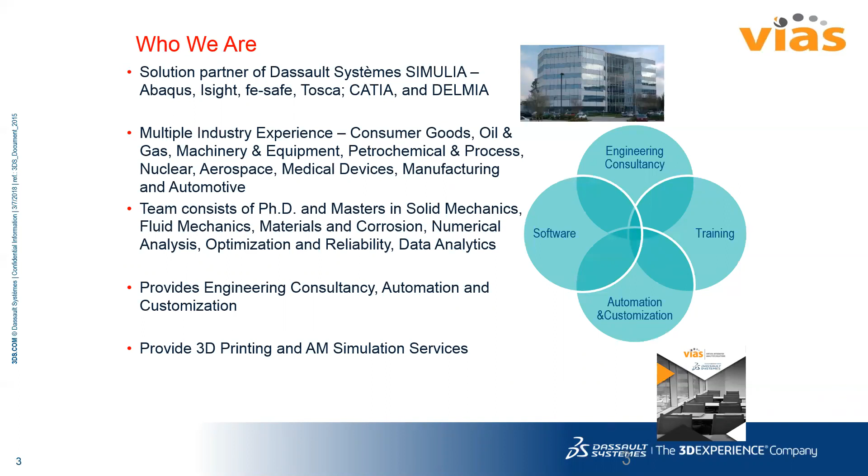So with this, I will hand it over to Jose for the first part of the simulation on the model preparation, and I'll take up on the simulation part later. Jose, can you take on the model preparation part? Yes, of course. Can you hear me? Yes, we can hear you. Yeah, so I'll let you drive.

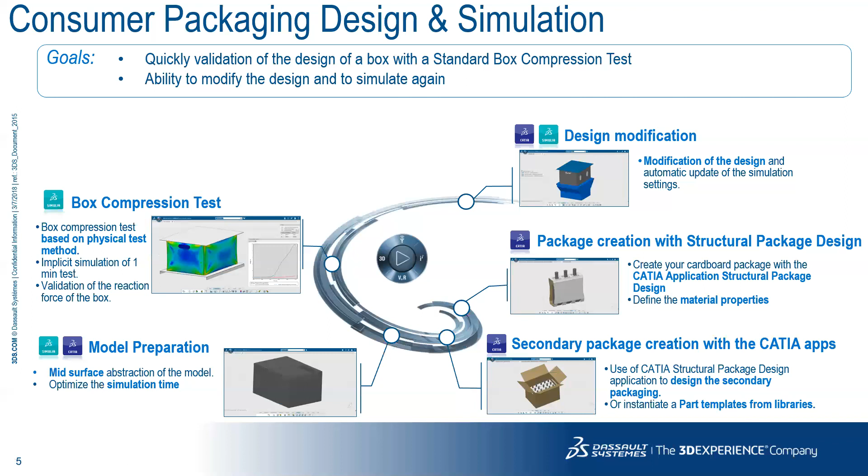And I am going to start with the creation of the package using a dedicated application of CATIA, which is called CATIA Structural Package Design. In a few words, the advantage of this design application is first of all to be a 3D native application. So it means that you are going to be able to design here, for instance, the secondary packaging around the bottle, around the primary packaging.

So what it brings, in fact, it helps to enhance the collaboration between the different stakeholders of the project. For instance, here, a brand manufacturer with the packaging supplier dedicated to carton packaging. So it enhances the collaboration and it guarantees a strong brand image all along the design of the different components of the packaging system.

From here, you can manage all the different foldings that you are going to create. It can be cutouts, perforation, crease, everything can be defined using this application. And from there, once you have defined your package, you can also map the artwork in order to have in a few steps a global view of the final packaging with the shape and its artwork.

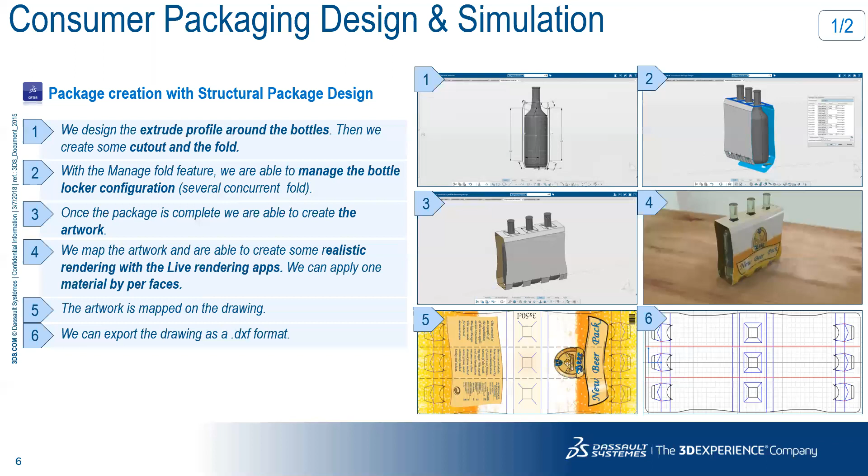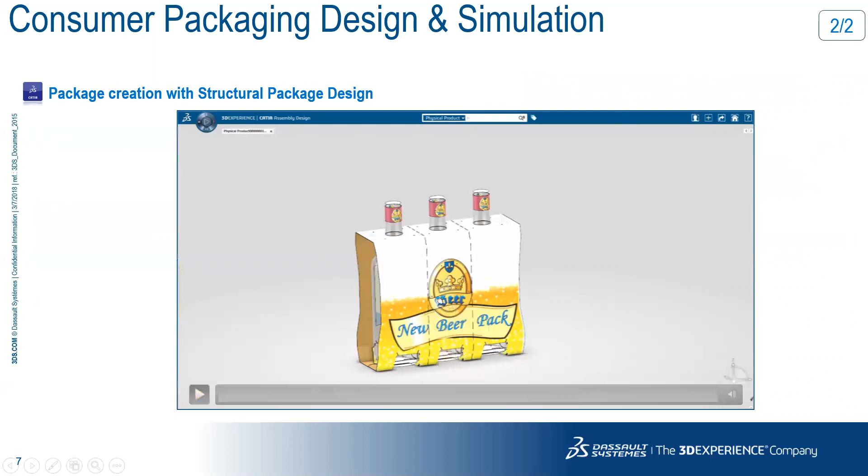And of course, you can then export the model into a DXF format in order to prepare the converting task, which is the number 6 of the slide that you have here. So to give you a better understanding, I just want to show you a short video to let you understand how we can make such a package.

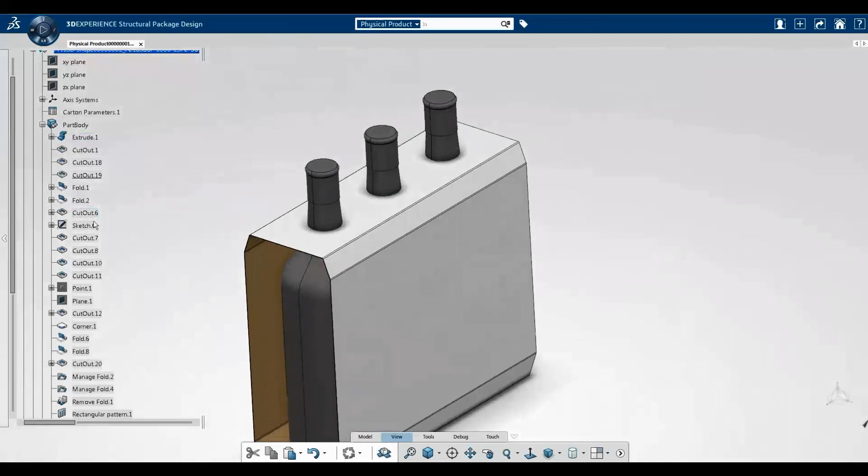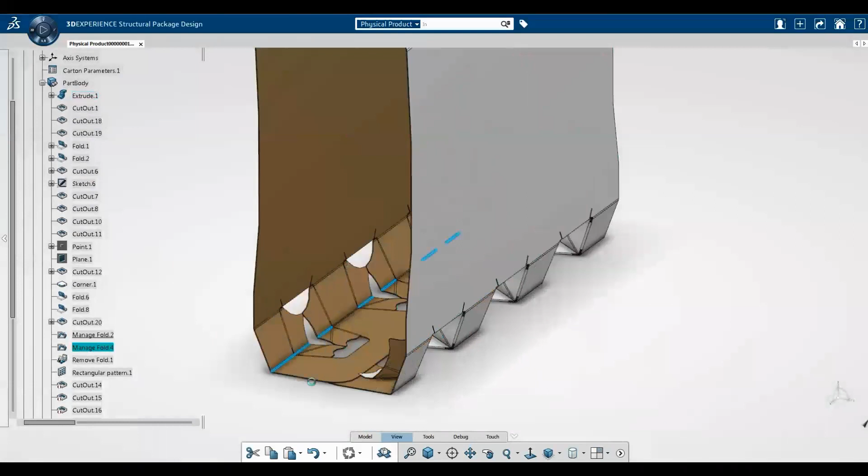So first of all, we start with defining the characteristics of the carton that we are going to use. And from there, we start the creation. So first of all, as I said, we start by creating around the primary packaging. We are going to define the different characteristics of this packaging, the cutouts, all the elements, including the lockers to create the package.

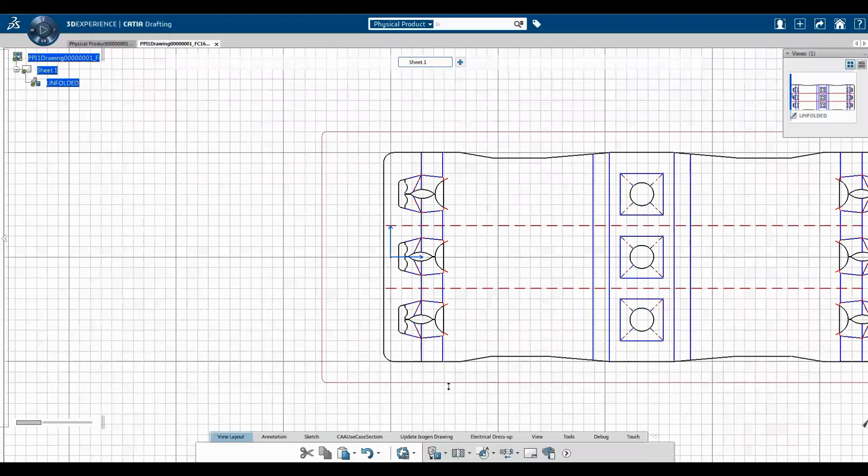And to make such a packaging, you have also to manage the sequence of the folding. It is very important. So this is something that we are able to do. And finally, we are ready with a DXF file ready to be sent to the converting. And we instantly always have the capability to go from a 3D view to a 2D view.

And finally, as I said, for the marketing validation, you can have a realistic rendering of your packaging. So everything is already virtual, but we have the capability to prepare all the work through this application. Once you have defined the consumer unit, you are going to work on the secondary packaging.

Here I want to focus on the capability we have to design using templates. Working by reusing existing parts, existing templates, instead of starting from zero, is a great advantage when you want to reduce time to market. You have at your disposal in the application templates coming from the two major catalogs, FEFCO and ECMA, giving you a large bunch of box templates available.

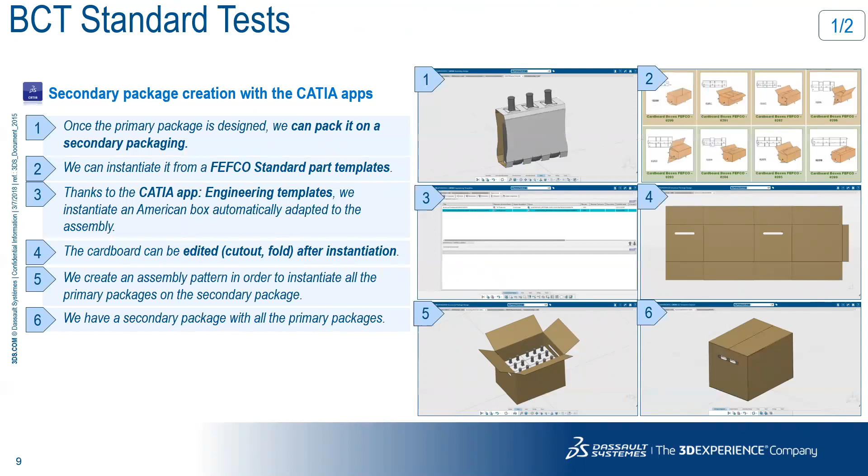So again, I have here another video to show you how you can easily work with what we call parametric design to create a new box using an existing template. Here, a packaging coming from the FEFCO catalog, and how you can adapt this template to your specific needs by defining the number of bottles, the number of packs that you want to have in this transportation box.

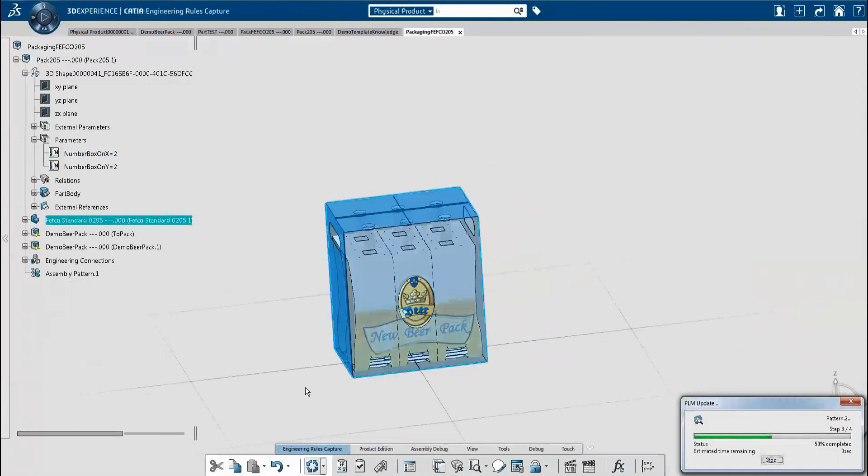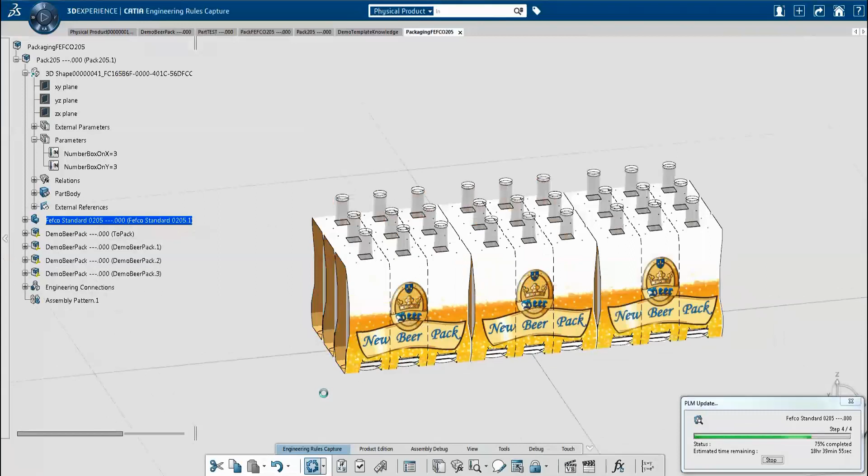This is what we show here. We have a 2-pack box, and we are going to show you how, just by changing some parameters, we can extend the size of the box in order to have more bottles into the transportation box. So you can see how agile is the way of working using parametric design.

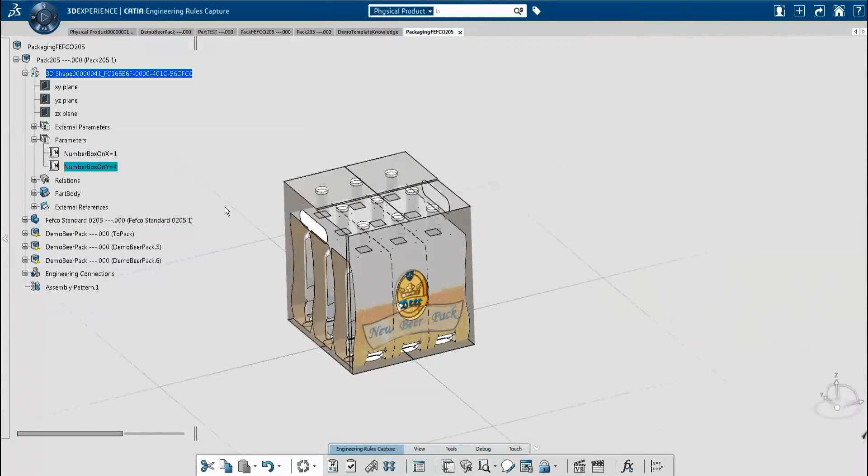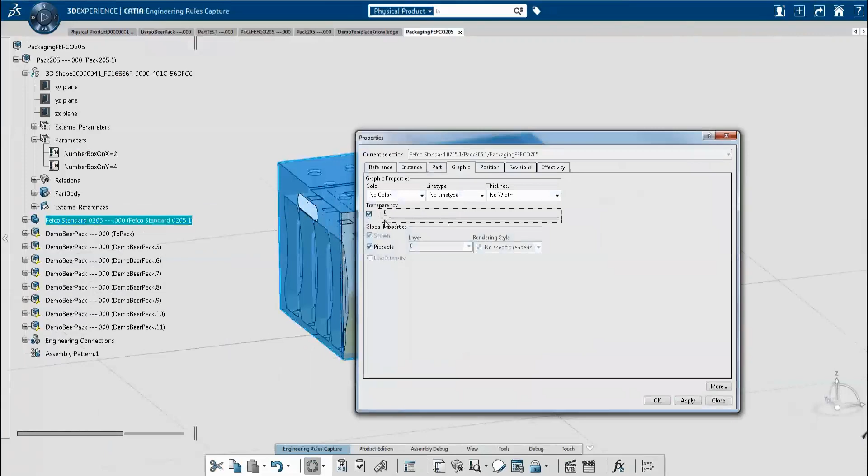And you can also make some refinements, some holes to create handles or to let the label be visible. Everything can be done very quickly.

But of course, when you do that, for instance making holes to create handles, you are going to modify the structure of the box. That's why simulation is going to be very important to make some validation, for instance a compression test.

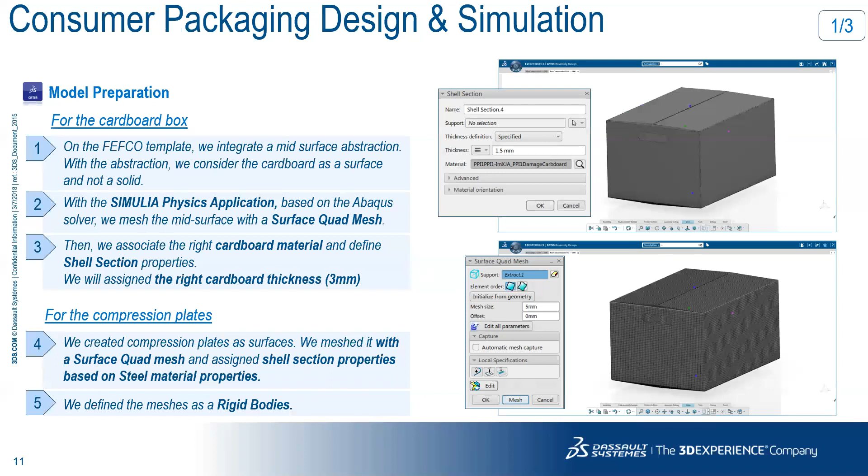For that, we need to go easily from the design model to a model which is ready for simulation. We have implemented an easy path to transform the design model into a model enabled for simulation with SIMULIA, so that we can transform a solid model into a surface model, having something ready to be used for simulation.

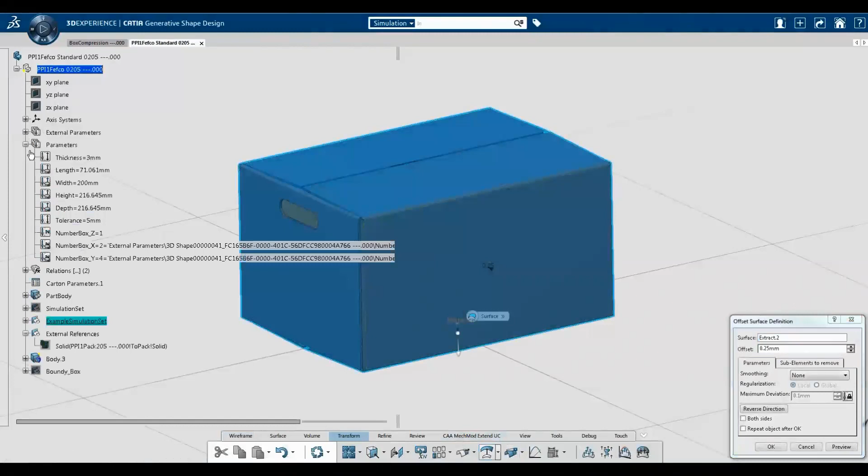This is what we show you here: how you can easily prepare a model to be ready for simulation. Everything here is done within a single application of CATIA.

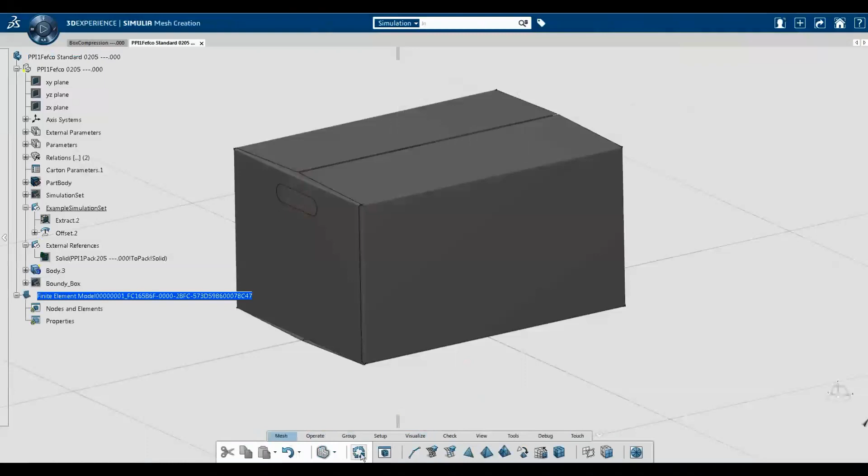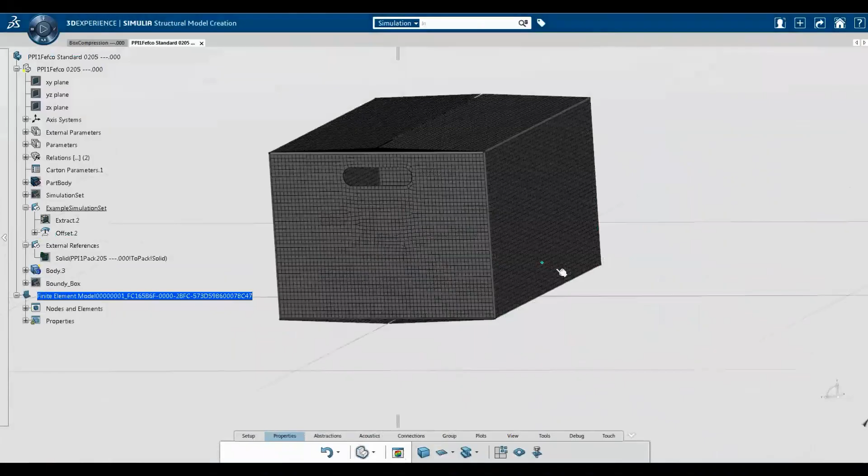And then you enter into the SIMULIA environment in order to make the right meshing that is going to be required for the simulation. So this is an illustration of the seamless continuity that we have between design and simulation.

The next step is to prepare your package for transportation. So we are going to see here how you can easily create a model of a palletization, and we are going to introduce some optimization routines which are available in our application. Here, just a short video to introduce the topic.

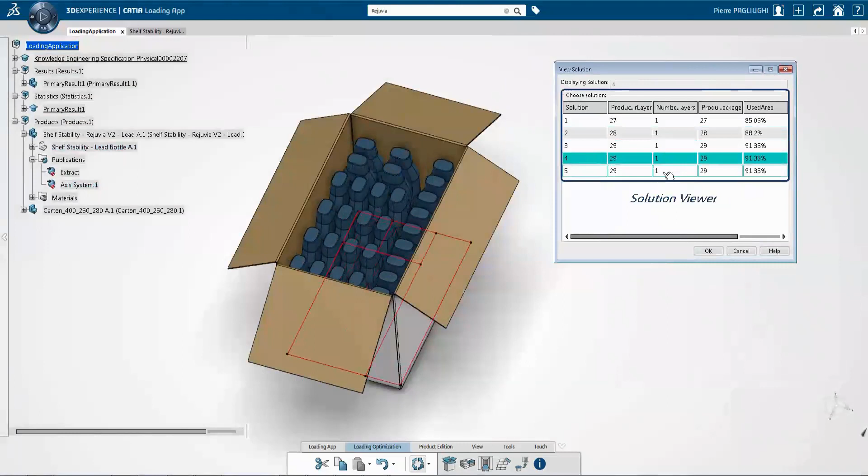So we are going to show you different ways of using optimization routines. Here, what we want to do is optimize the number of bottles that you can have in a defined box, and by adjusting different options, you can see that you can improve the number of bottles which can enter into such a box. This optimization routine can be applied to optimize the filling of a box, but it can also be extended to optimize the way you stack boxes on a pallet.

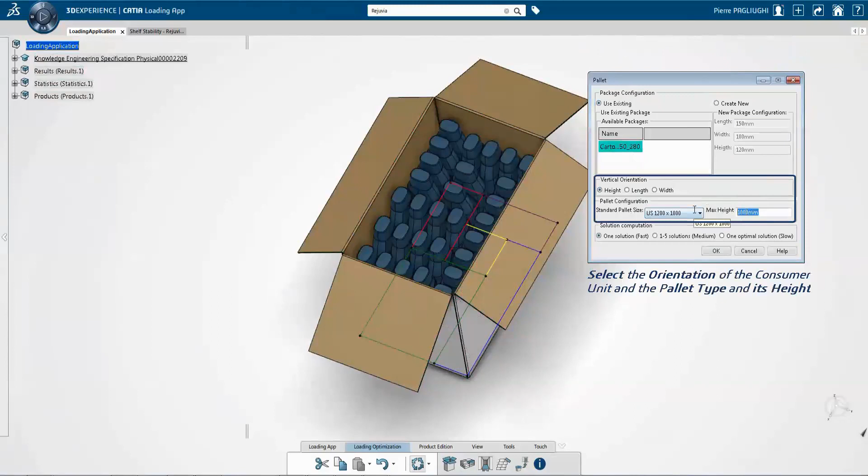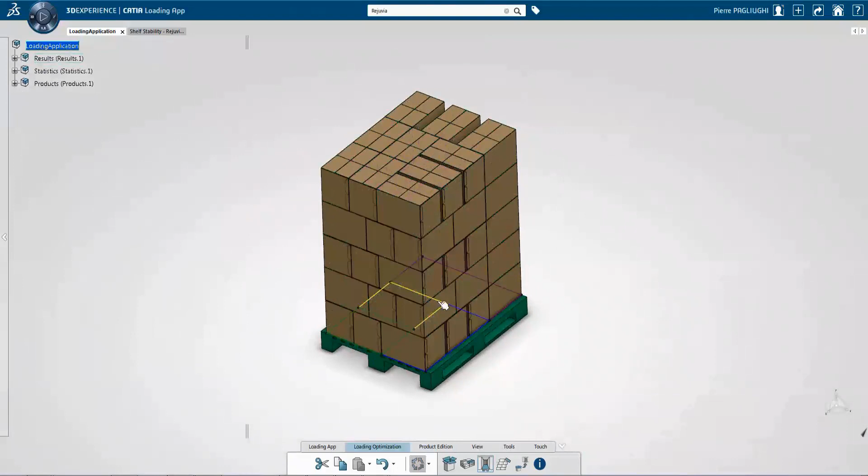This is an example of how you can optimize a pallet by giving some parameters like the height and the weight, and you can see that automatically we optimize the stacking of the box to increase the number of boxes we can carry, but also to increase stability. That's why you can see we have different ways of stacking the box.

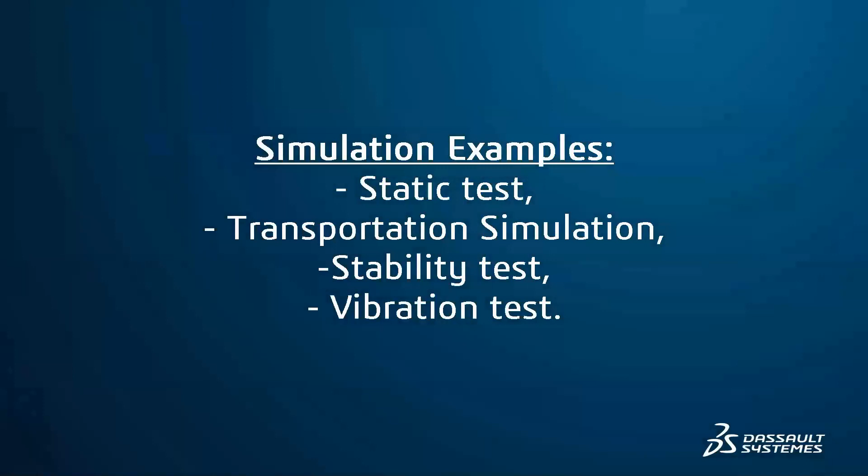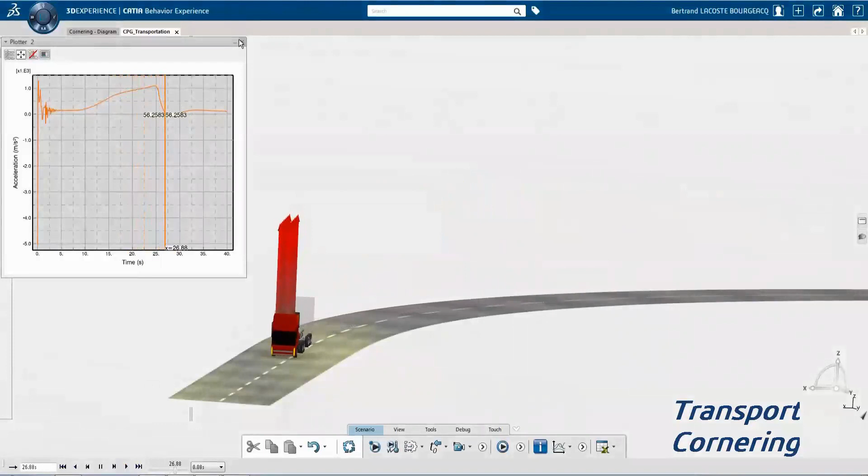And after, you are able to prepare the pallet model in order to make some simulation, and Swapan is going to give more insight on the way of working on the simulation. This is just a short overview of all the simulation you can do relating to palletization and transportation.

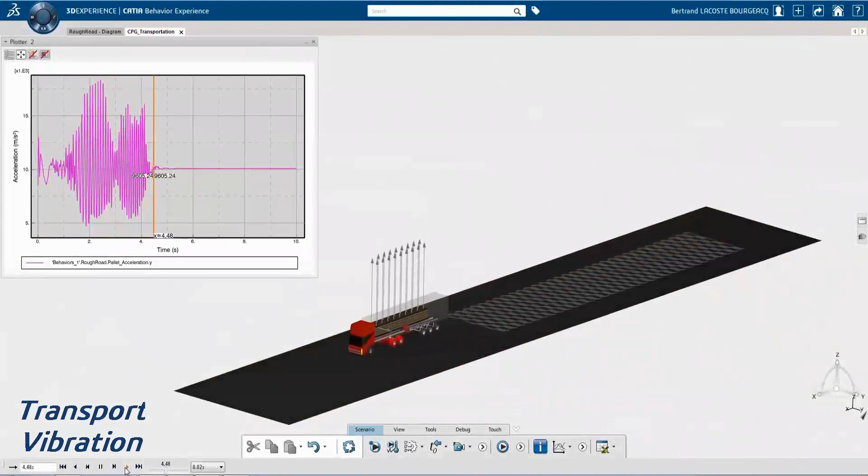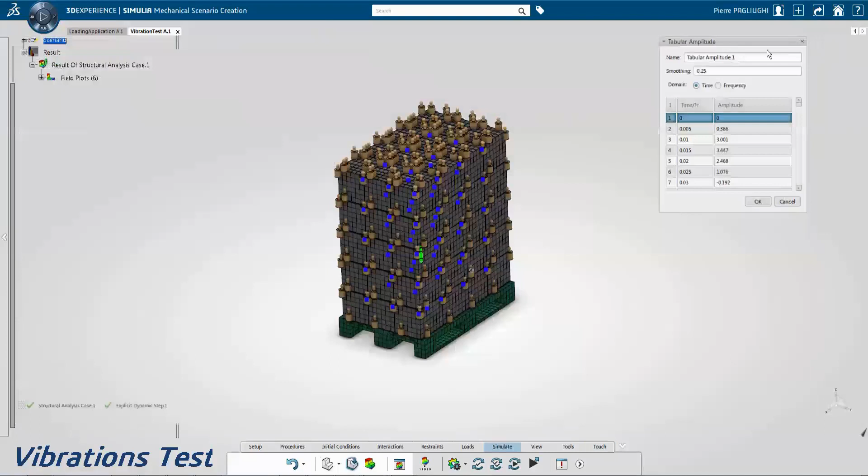Here you can capture all the forces applying during braking by having sensors on a real truck. Once you have captured these forces, you can apply them to the pallet and check how the pallet is going to behave, and validate that it will keep stable. This is what we explain here, and Swapan will go into more details. And for instance, sometimes the forces are too strong.

So I think that, just to summarize the capability of the pallet optimization that we can provide, you have here some examples of how you can arrange the blocks on a pallet to optimize either the number of blocks or the stability of the pallet.

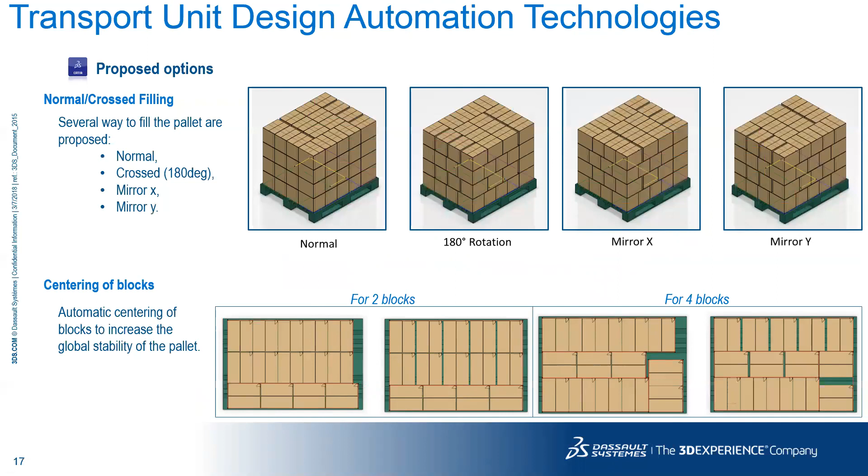A different way of centering the blocks, which is really important for the stability here. It's what we have, and now we have designed a holistic packaging system from primary to secondary to transportation to pallet, and all these elements are available for simulation.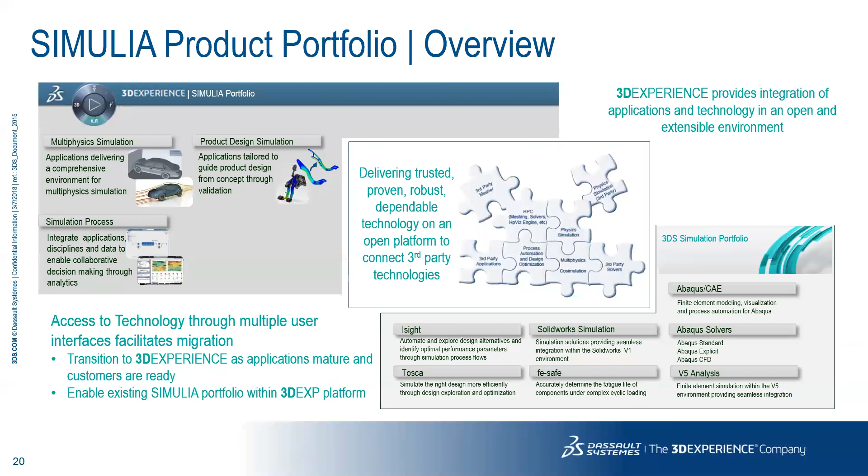All right, so jumping straight into the transportation part. If you really think of the integration of transportation and simulation, what do you really need to know?

We need to understand what are the normal forces on the pallet during its entire transportation journey, and what are the different forces on it. One would be the normal forces, which would be governed by the kind of terrain you encounter.

So you can bring in your different terrain possibilities - what are the likelihoods of hitting a bump and all of those things. And if we have those inputs and apply them onto the pallet, we can get a prediction of the acceleration and forces that each individual box is likely to experience.

Then we have the acceleration and deceleration forces. When you accelerate, what is the force in the forward direction, and when you brake, what is the force it encounters, and when you take a turn, what are the lateral forces we need.

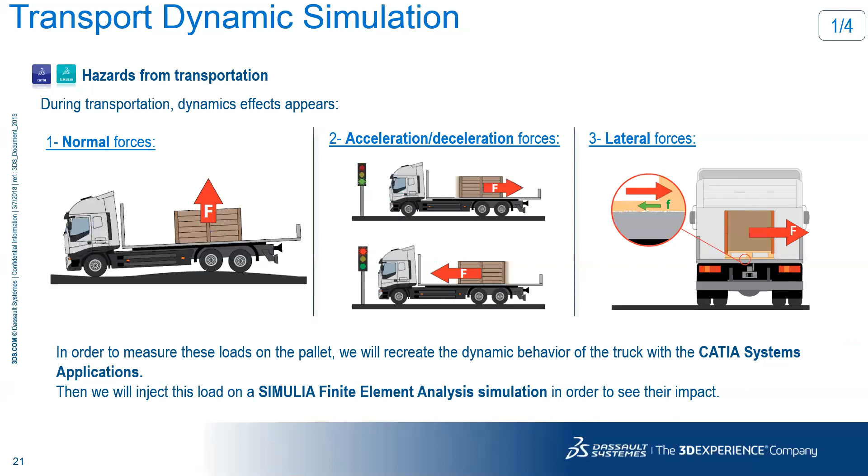So as we have seen, we define the model in CATIA, and we can integrate the CATIA and SIMULIA pieces here. We can get the loads from the CATIA systems application where you've defined it, and then do a much more exhaustive analysis to get an idea of the normal forces on the pallet.

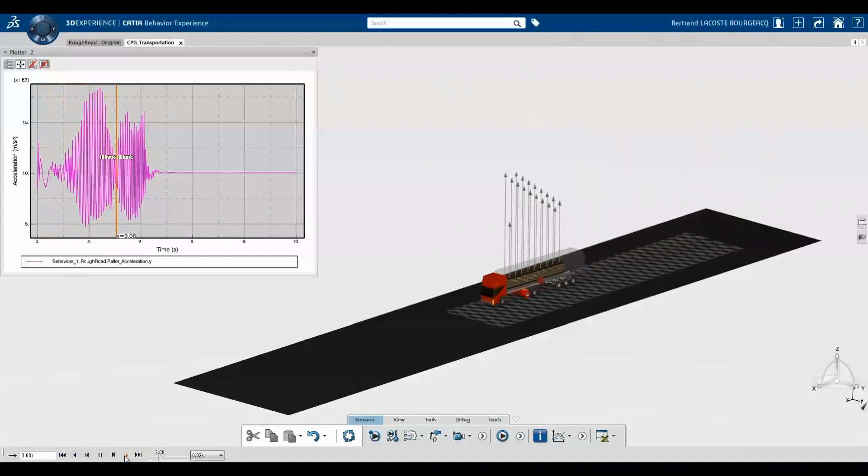And we will look into a few animations here - we already looked into some part of it. So here, we can get a sense of what are the normal forces, and we can export those forces to a CSV file for further analysis.

So we can copy the CSV file for further analysis, and then do much more detailed analysis on each one of them. In a similar way, we can do that for acceleration and braking.

You can see how the forces vary as we do the acceleration and braking, and we can export those values when we do either the acceleration or braking, and do a much more detailed analysis subsequently on the individual pallets. So we export this again to the CSV file.

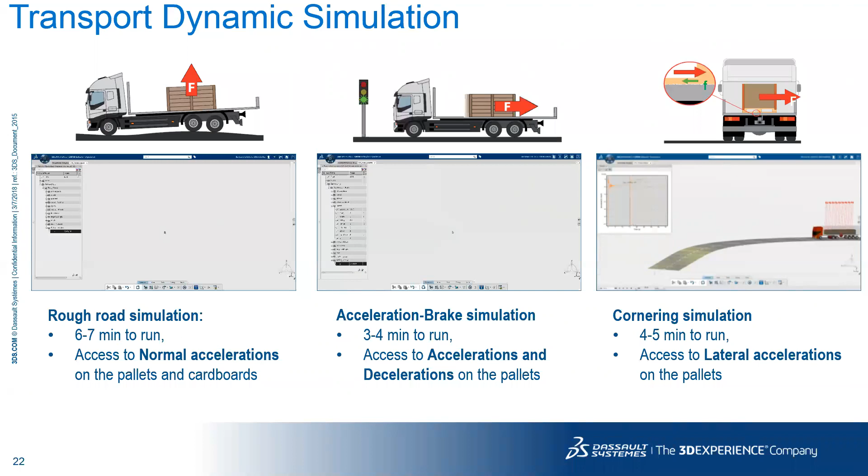Similarly, we can do that for the cornering simulation. When you take a turn, what are the lateral forces and lateral acceleration it is likely to encounter on the pallets. I wouldn't go into the animation of that - we would look at further detail.

So once you have the forces, you're actually ready to do much more work with it. But before we jump into that, say you have your pallet, you want to wrap the pallet.

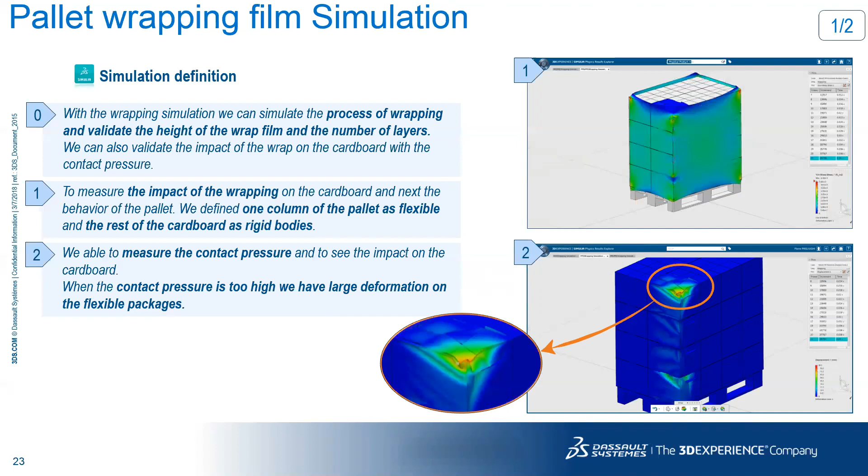You want to understand what is the wrapping strength, what is the height, what is the contact pressure. Now, since you have the normal forces, the forces it is likely to encounter in its transportation journey, you can use that as an input to understand things at a much better level at this point.

So what we can do is a wrapping simulation to understand the forces. Here you see the wrapping simulation. We wrap the paper along the pallet. We can look at the contact forces, and we can look at the stresses.

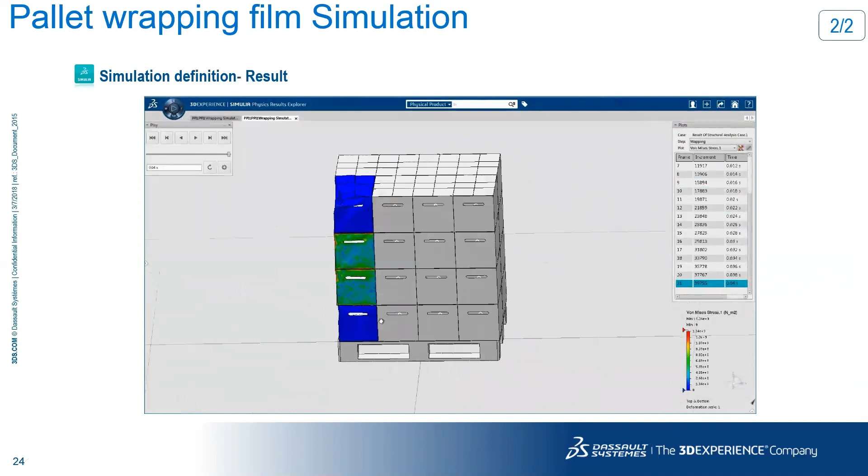We can optimize the height, and we can optimize the thickness of the material. I wouldn't get into the details of the paper modeling because it's kind of a tough simulation. How do you actually model the shrink wrap? How do you model the wrap? That's one of the strengths of the solver, that it can really handle this kind of complex contact and nonlinear analysis.

So you can do much more exhaustive studies on an individual basis.

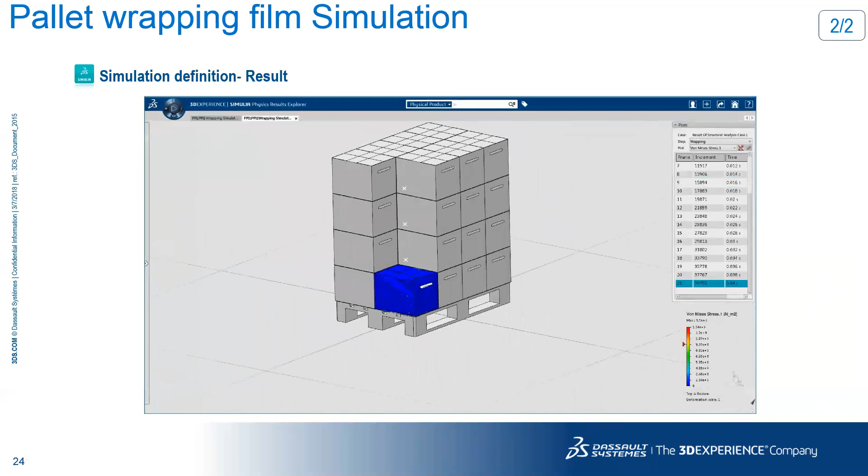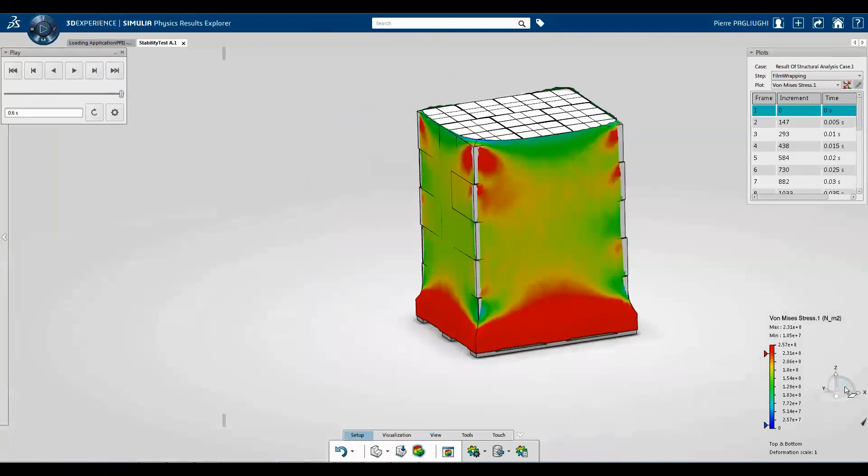Next, as I said, we have the normal forces from the transportation journey. We can basically understand the strength of the wrap here. In this case, you can see exactly, we'll look more into that. So you have your wrap study here. You're looking at when you apply the normal forces, what would be the expected stresses, the contact pressures, and those details. We can look into those things.

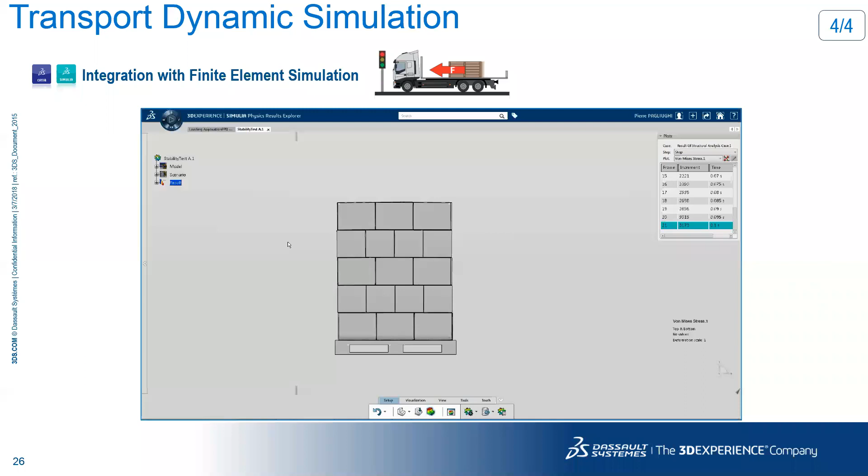So we can look at it, and there are a number of things we can do on the post processing side to understand in a much more granular way what would be the impact of the forces.

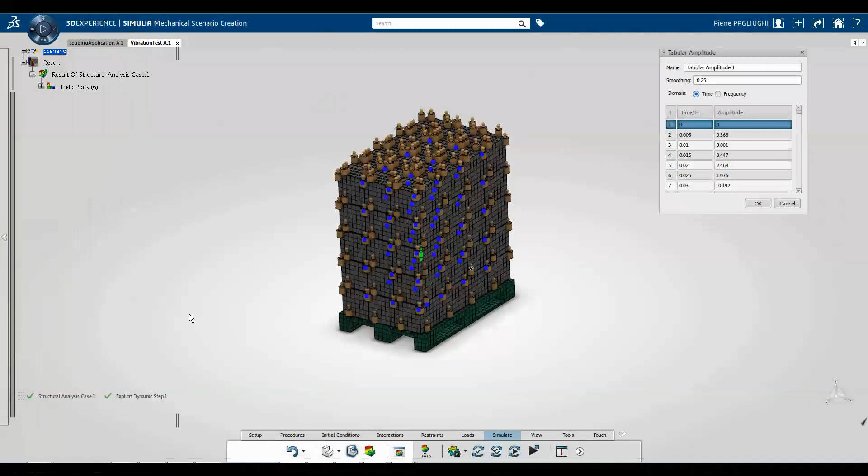So we are importing the accelerations we had from the previous one into this model, and we are going to do further simulation on this. So we know that, okay, if we don't have a wrap, what happens? And if we don't have a wrap, we know what happens.

So then the next step is logically, okay, let me put in a wrap. Let me try to vary my thickness of the wrap. Let me try to experiment with various heights, and let me see if that makes a difference. We can also do many other types of tests.

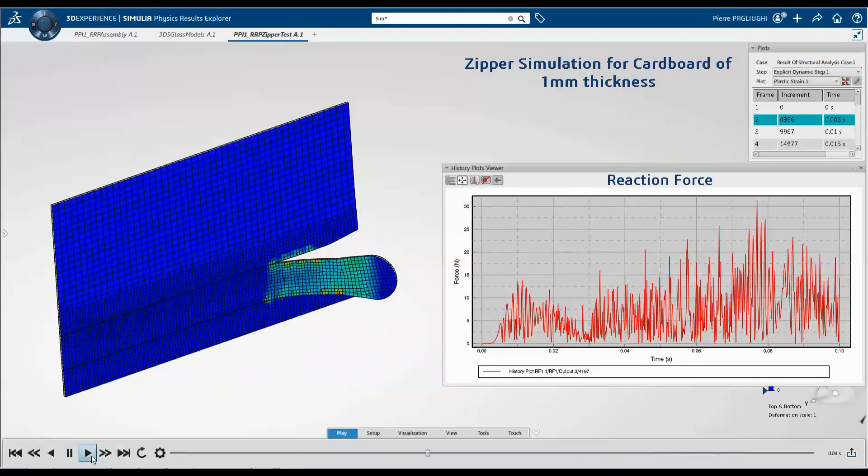It's a cool kind of thing, we can do a zipper test. We need to be able to model failure for this kind of material, and the solver has a number of capabilities to be able to do that. There are a number of approaches we can take, from the details of fracture mechanics to more simplistic approaches. If you have the test data, we can go into this.

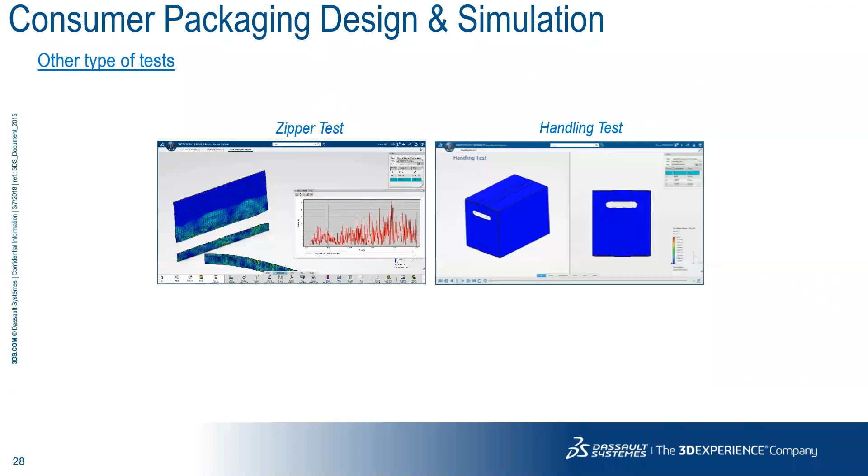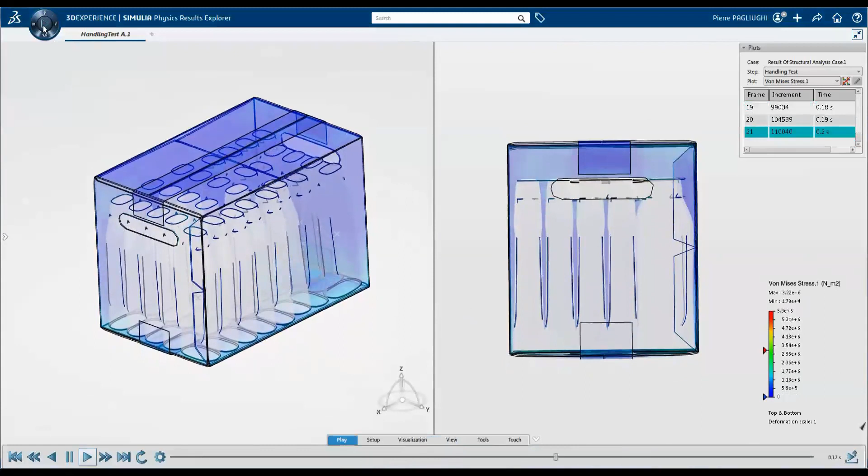So we can also do handling tests, and we can see this. This was the model created in the earlier part, and we can see the power of visualization here. We can actually see the impact of, as we do the handling, how the bottles interact among themselves. The contact between each of the individual bottles is captured.

And we can, if necessary, revert back to optimization, and we can see if it would make a difference if we can pack in more bottles or we can pack in less bottles.

All right, so we can do drop testing. That is pretty standard. But the cool thing here is that we have a wine bottle with a packaging, and we do the drop test with that, and we see that, okay, if this is breaking, should we add more reinforced materials or not?

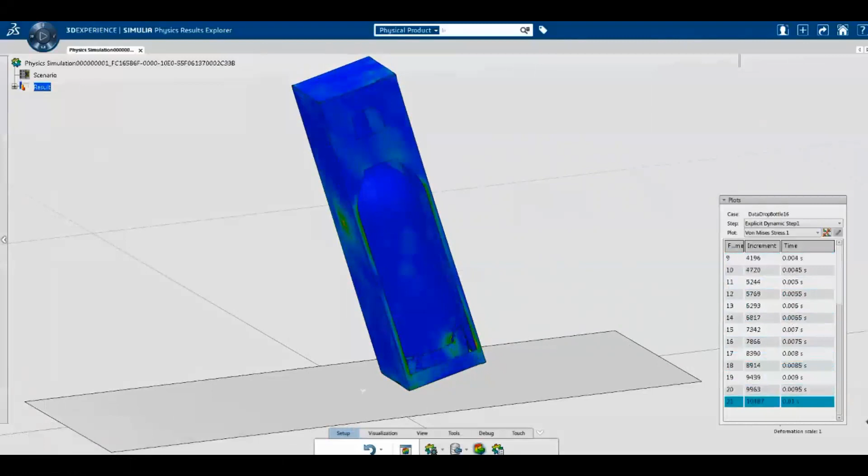So here we do it without any reinforced material. We see that it's likely to break at the bottom at this velocity. So how do we avoid that? And we can avoid it.

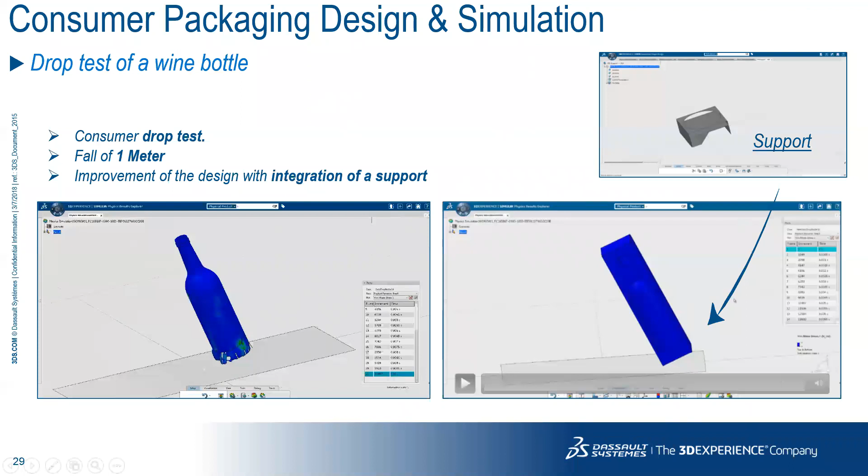So in the next step we'll see how we can avoid it. We add some support here, and we do the simulation and see if this would help. We can optimize the amount of material required in the support, making sure that we are not over designing, or it's not under designed.

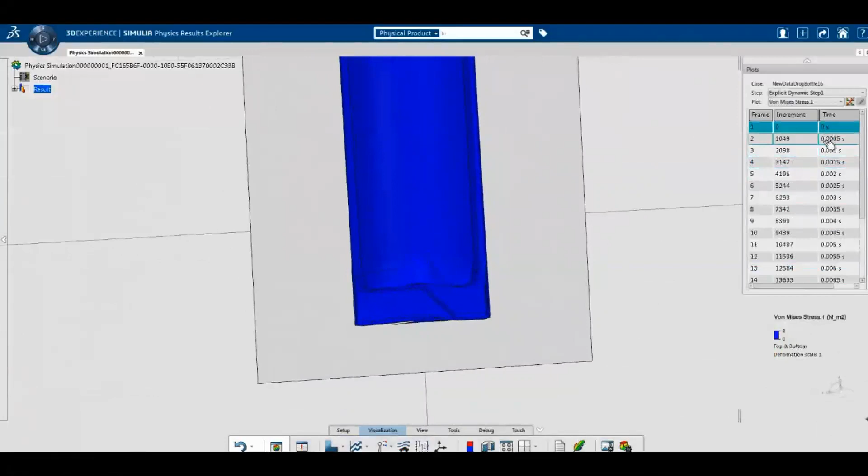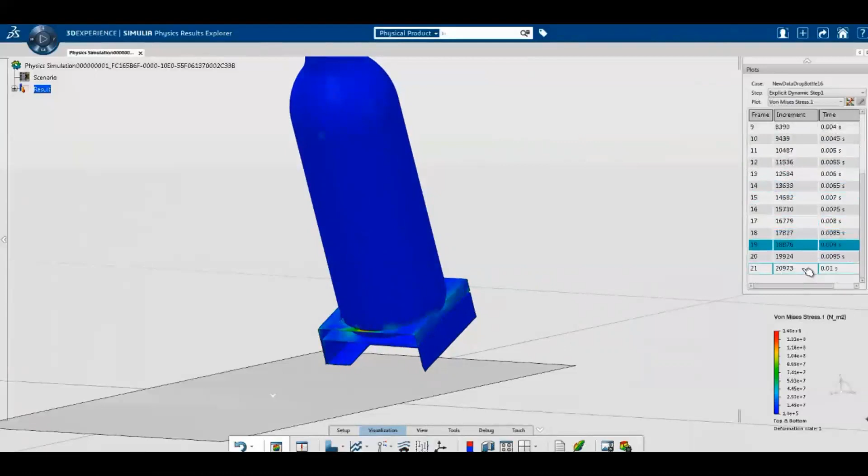So you can see the power of the simulation. Remember that this is all integrated with the model creation on a single platform, and to me, that is a game changer. I've been in this industry for about a decade and a half, and there is a significant amount of overhead involved in transferring data from a CAD package back to your simulation, and that back and forth usually isn't frictionless.

So having looked at this, let's look into some more details of the paper modeling here. What are the different challenges that we really have for the details of paper modeling?

To actually simulate paper is much more difficult than to simulate aluminum or steel, because paper does not follow the usual laws of continuum mechanics. With steel and aluminum, you can define your linear elasticity as isotropic, and you define your plasticity. The mathematical modeling of those metals is much more simple.

In the case of thin or packaging material, some of the laws differ. If you're expecting a particular bending stiffness with your in-plane tension, you may not get the exact value. Your bending stiffness is dependent on a number of factors. So we need a framework which can model all this complexity along with failure and so forth.

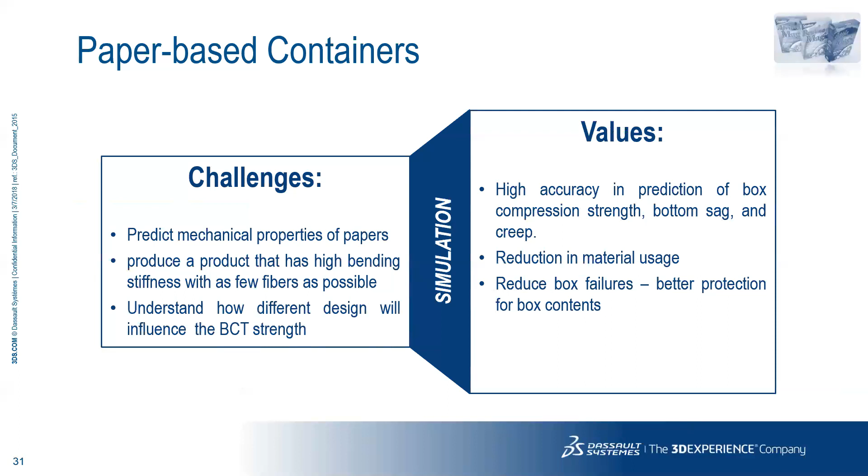The end goal is that we need to produce a product that has high bending stiffness with as few fibers as possible, and then understand how that product would behave under various loading scenarios, for box compression testing, sag, creep, etc.

Just to get a little bit into the details: if you have your cardboard material, looking at the cross section, if I apply a force, my bending stiffness initially is going to be proportional to the force I apply. As I keep applying more force, I'm going to see more and more failures in between the plies, and some delamination happening in the plies.

As I see more and more delamination, it's going to buckle, and at some point it's not going to matter — the bending stiffness is going to be constant. It's just going to buckle straight away; basically it's just going to go down straight away. So we need to be able to capture all this detail in the simulation.

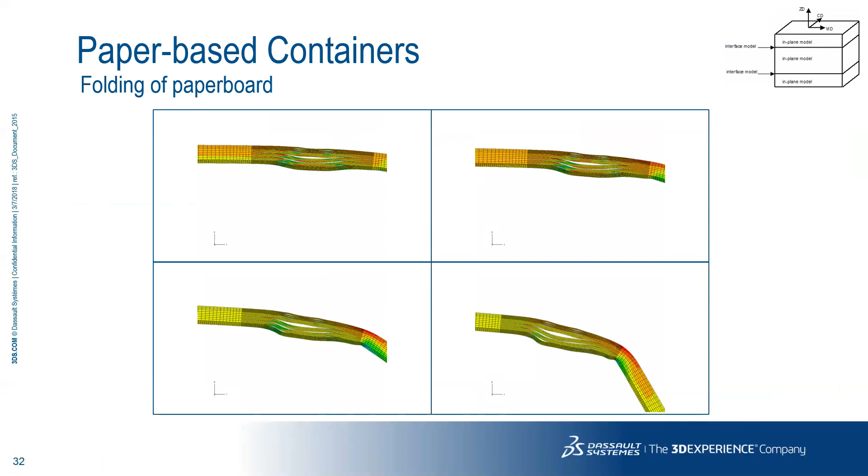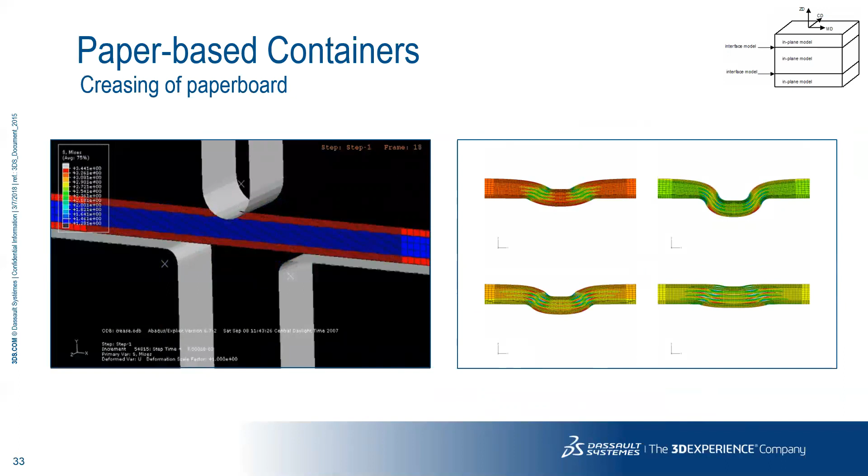This is actually really the hard part. From a simulation standpoint, if you look at those earlier animations, they look kind of cool, but to get this right, you need a solver that is powerful and capable enough to handle this. This is a simulation I had worked on for the creasing of paper, and we had to write our own custom material model at that point to get this right.

So what we need, in a nutshell — and I'm giving a simplistic overview — we need elasticity, and elasticity is likely to be different in every direction because the paper material has more fibers aligned in the machine direction. So the stiffness in that direction is different than the stiffness in other directions. We need a framework to be able to specify that.

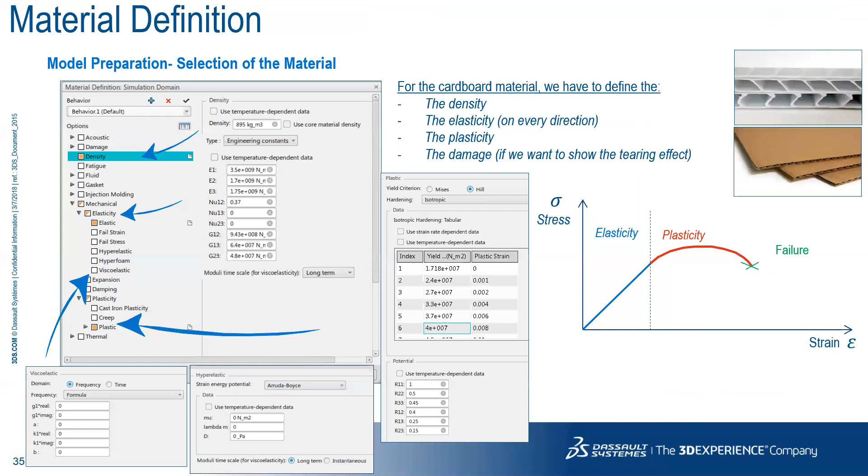Orthotropic elasticity — we need plasticity, so we have an elastic zone and a plastic zone. In the plastic zone, once you apply load, the stress doesn't recover, the deformation doesn't recover completely. Then you need a framework to model failure, and you can define all of these. We have a number of material models to be able to do it.

Once we have the material model defined, we can investigate the impact on the different corrugation layers, and try to optimize for the different corrugation — whether we need a single corrugation or multiple corrugations. We can do your compression testing, you can do your bending testing to understand those details.

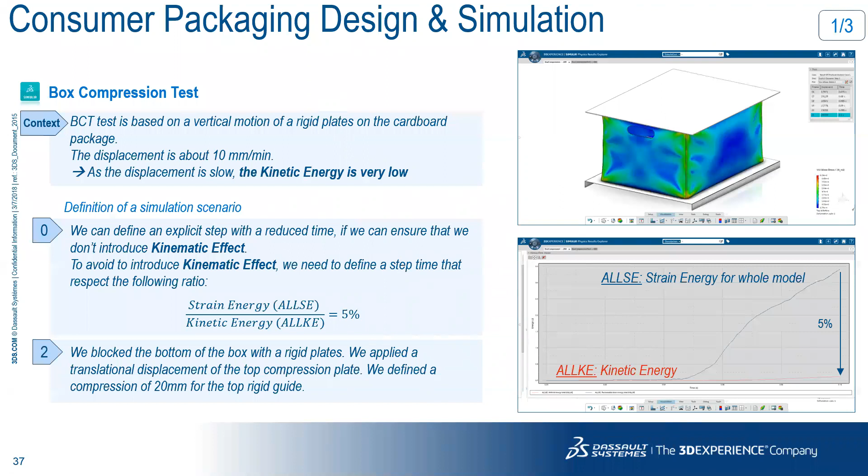Once you understand what kind of material you need for the corrugation, you can homogenize it and put it back in our earlier models. You can actually get rid of the corrugation and try to capture the material properties of the corrugation at a much more macro level, then apply it to the model we had created earlier.

So here we are going to create an explicit dynamic step. It's a nonlinear material, we are expecting high deformation, and the explicit solver is best geared to handle that.

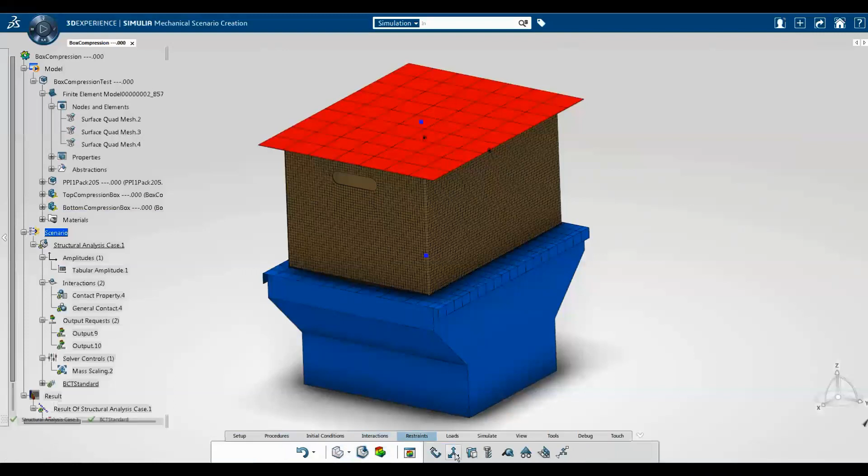So we can define contact pretty easily. There is a capability called general contact in Abaqus. What it does is that you don't need to define all the contact interactions individually — you can define it at a global level, and the solver will automatically take care of it.

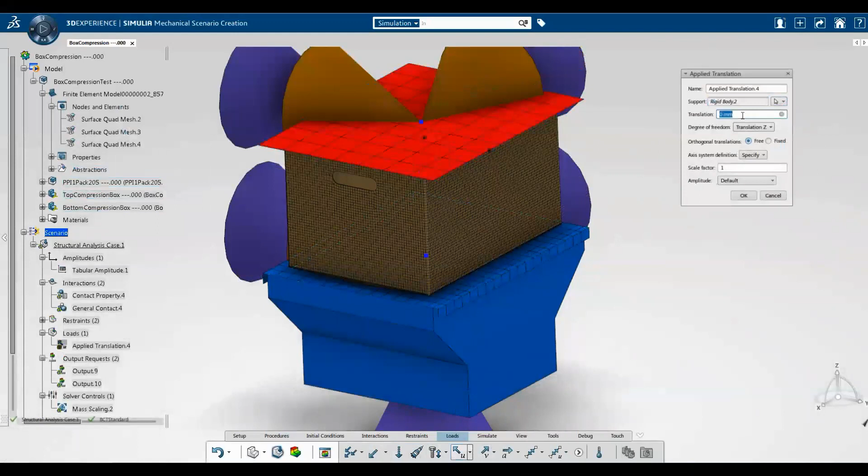We can apply either a load or displacements. We can treat the plates as rigid bodies, so the upper and lower plates here are treated as rigid, and we're going to apply some amplitude here to see how the box deforms.

We can monitor the output and output variables, the displacement, the forces. Next, we do the simulation checks.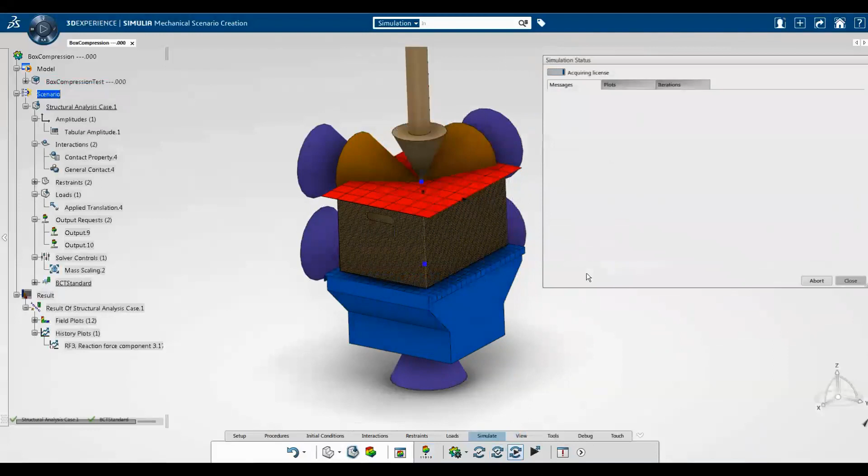So you can look at the sag. If you want to keep all the details of all the corrugations in this model, it is definitely possible to take that approach too.

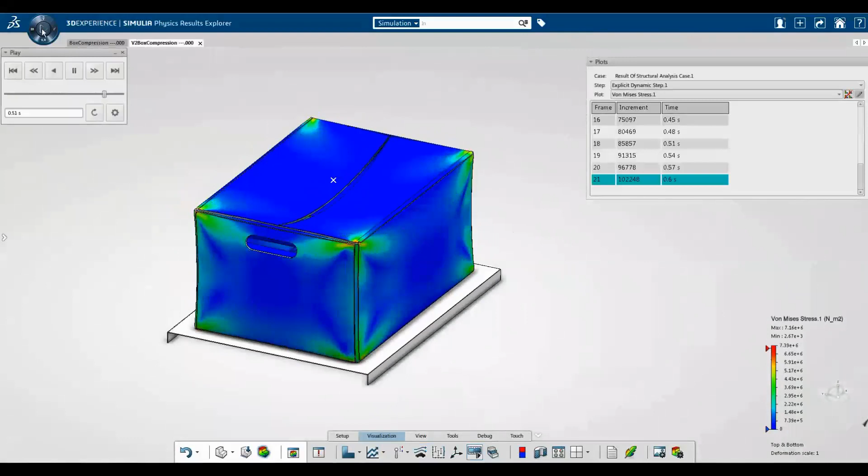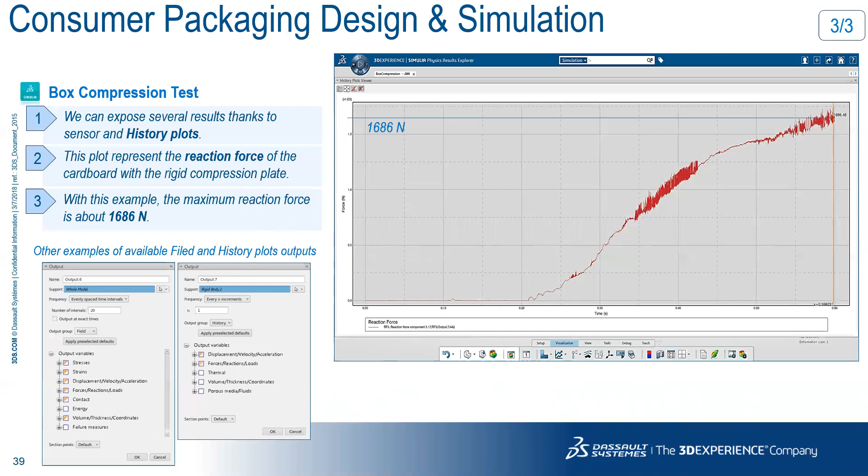Or you can prefer a much more macro approach where, once you understand the material properties from the corrugation, you apply it on a macro scale to simplify the model. So you can look at the sag, and that gives you an indication of how much sag is in the box. We move on, we have various history plots, we can get the reaction force and all those details, so we can understand if this will be compliant. How much force, how much is the maximum force it can take, and we have an understanding of what is the maximum possible force it's likely to encounter from the transport simulation we did earlier.

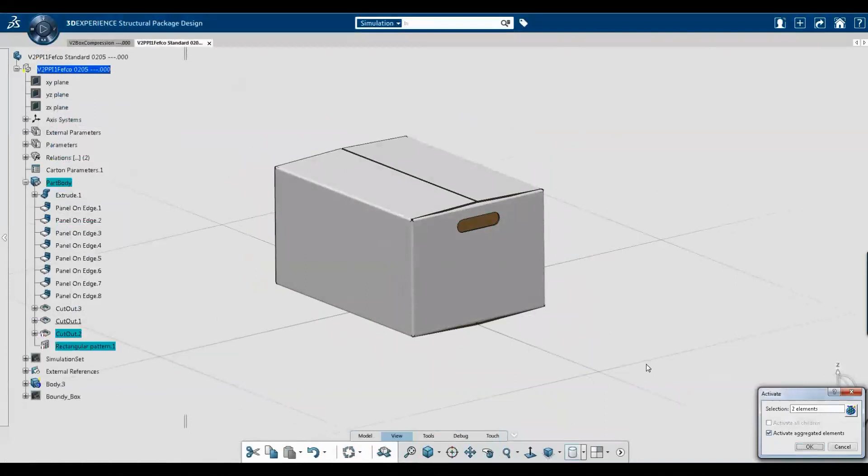I think the coolest thing is that we can really try out all the design modifications required, to see if we can change the design a little bit. Can we alter it? What would be the impact? Can we save on some material? If it's under designed or over designed, we can do those things. You can create parameters at the CAD level, and those parameters will be respected at the simulation level. Here we create these two holes, we can make simple changes, and we can explore the design space much more exhaustively. The same thing with physical testing would cost you a lot of money, but if you have confidence in your model, simulation is a very powerful technique which can help eliminate a lot of cost.

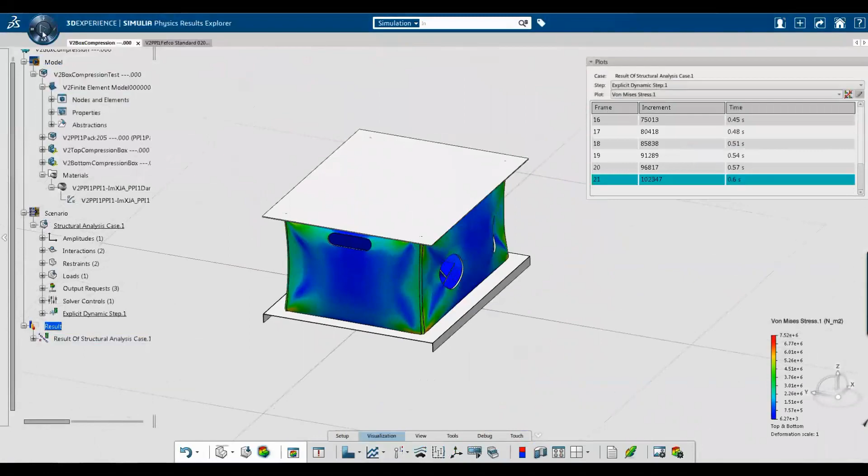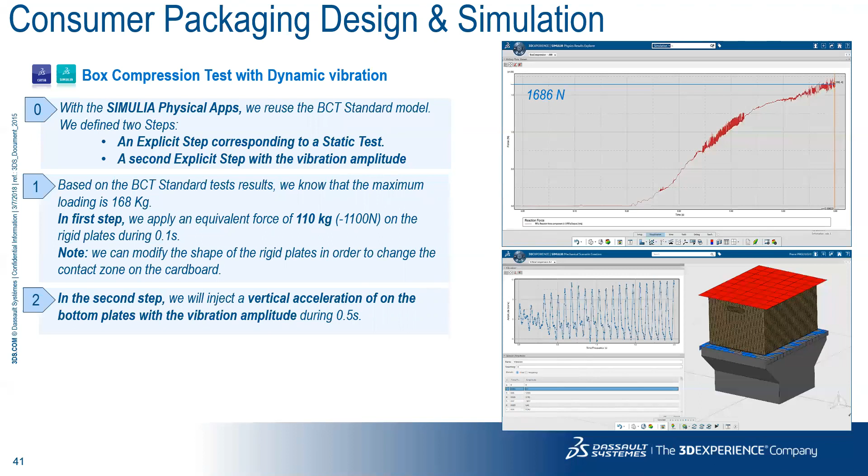All right, I'll move on further in the interest of time. Once you do that, at the individual box level, you can still do your vibration testing. We have the data about the forces we're likely to encounter, the normal or lateral forces each box is likely to encounter in its journey, and you can do that at the individual level. I'll not go into the video here again.

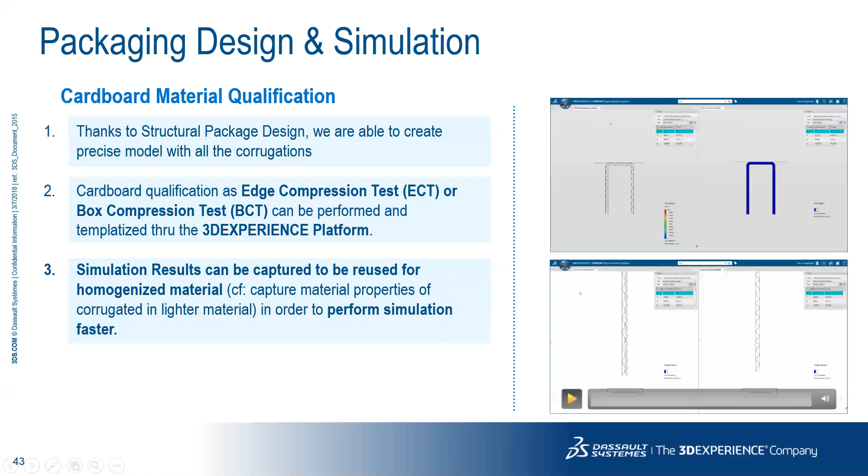It'll be a repeat of the earlier video, just a reiteration. This is a single corrugation we had. You can actually optimize for the number of corrugations, whether you need one layer or two layers, and check whether you have optimized for that. If you need more strength, you can try those things out. Okay, this is what I get with one layer.

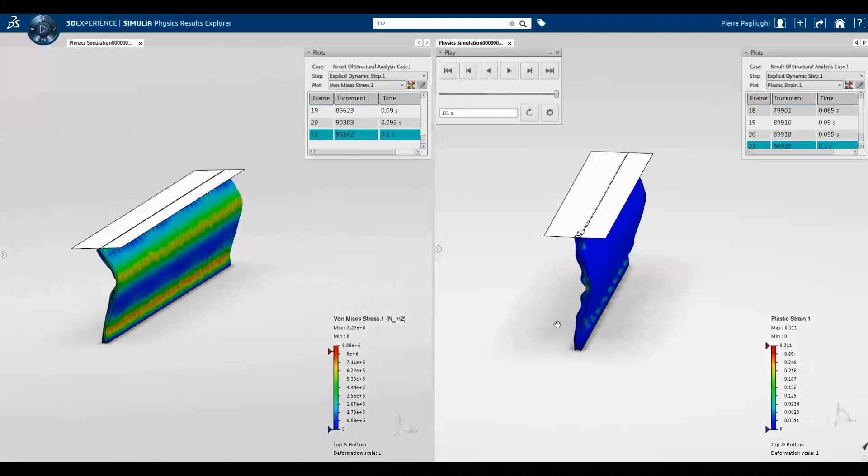This is what the stress looks like with one layer, and this is what it looks like with more layers. This, we can see, is much more stiff, and depending on what is the expected load in service, we can optimize for that. Once you have the data from here, once you know the stiffness, you

can approximate the properties of the corrugated cardboard and do more work over there. This is an example of a real life simulation which was done. This is a simulation of a box compression test of washing powder packaging. On the top is the real picture, and you can see it's stressed in the corners. You can mimic the simulation here.

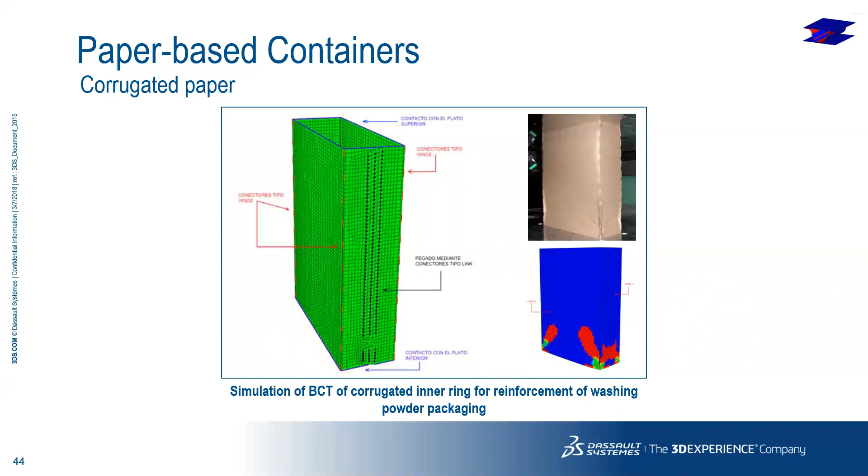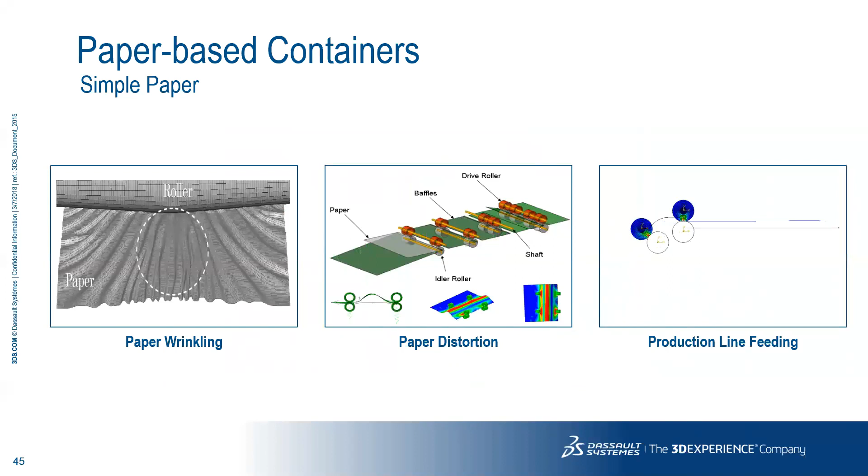Just as a recap, we can capture wrinkling in the paper material, and even for manufacturing. I haven't gone into the details of manufacturing of paper here, but even that simulation we can handle. That has its own different set of challenges, but we have the framework and the physics to be able to manage that, to handle that. You see here the distortion of paper as it moves to the manufacturing line. You can have a much more simplistic 2D model, just to give a better idea of the contact pressures in the rollers, and all the papers, and you can do it in many ways.